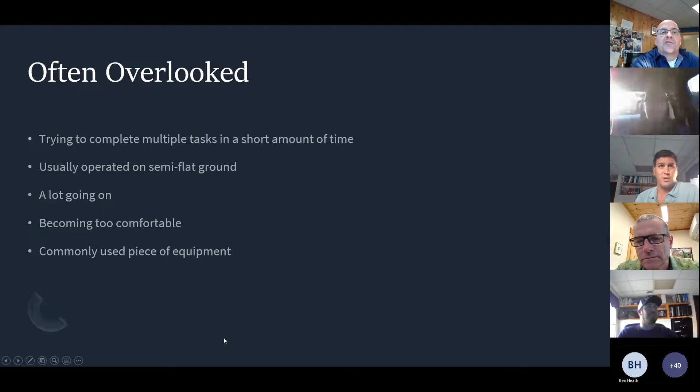Do you have the PowerPoint? Yep, we've got it up. We can see it. The often overlooked bullets are here. Do you see that, Hunter? I don't. So one of your first bullet points we had here is trying to complete multiple tasks in a short amount of time. Yep, I can see it now.

So yeah, these are all different reasons why it'd be overlooked. For trying to complete multiple tasks in a short amount of time, obviously there's a lot of things you're trying to do throughout the day and trying to get a lot done, and that can cause a lot of ruckus and can make things difficult at times.

But another reason is they're usually operated on semi-flat ground. For example, you're usually in a nice loading area, unloading area, so it's usually a pretty flat area, and you don't really think about safety hazards and things that could go wrong. Becoming too comfortable, you just get really used to the equipment and you don't really think anything can happen to you. You don't really take the time to think about safety sometimes, even though you really should.

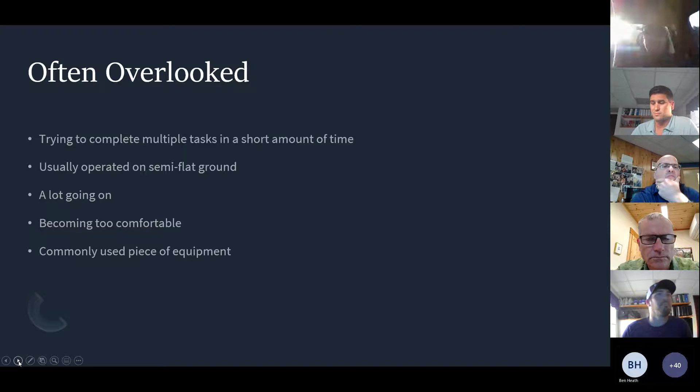And lastly, it's a commonly used piece of equipment, so that kind of just makes you think it can't really happen to me, or a lot of people use them day-to-day, so you don't really think they're that dangerous. None of these are excuses of why you should be overlooking safety, but this is definitely usually the reasons why people do overlook it.

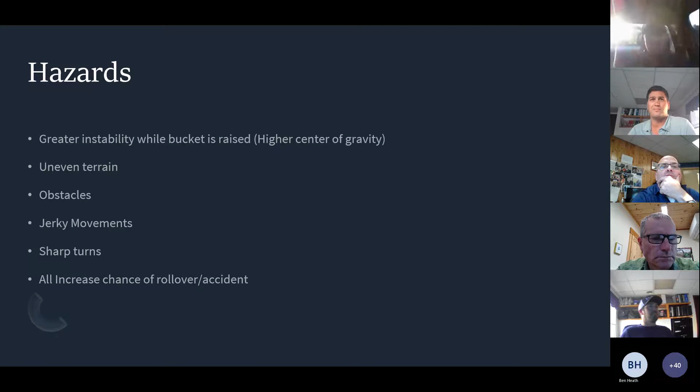Some hazards you encounter while running a loader are instability while the bucket is raised. This gives you a higher center of gravity and can make it easier for the machine to roll over. Other hazards include uneven terrain, obstacles, jerky movements, and sharp turns. All of these increase the chance of a rollover or an accident.

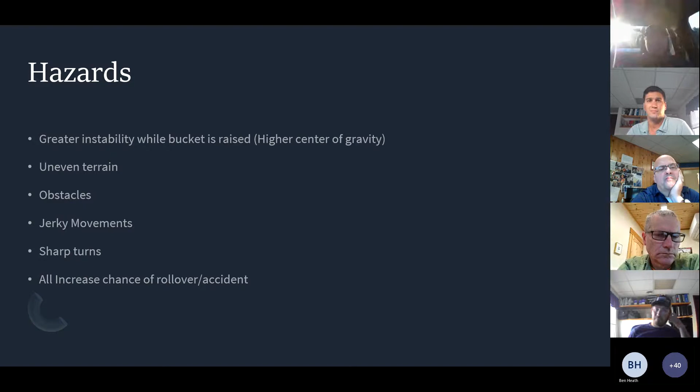Next slide. With accident prevention, usually in a loader you're doing two main things: you're either traveling, or you're going to be unloading or loading.

Some accident prevention tips for traveling: turn the machine at a low speed, and carry the load as low as possible to the ground, especially on a steeper slope or incline. You want to keep that load as low as possible, since the higher center of gravity you get when you pick the bucket up is not very good on steeper slopes.

You do not want to turn the loader with a load raised above it. This gives you a higher center of gravity and can make it harder to control. You want to keep the loaded bucket facing uphill.

Be alert for uneven ground and keep away from edges of banks and slopes when possible. Obviously you're not going to be able to do that all the time. There are times you're working on a slope or near a steep bank and you don't have a choice, but when you can avoid it, you should.

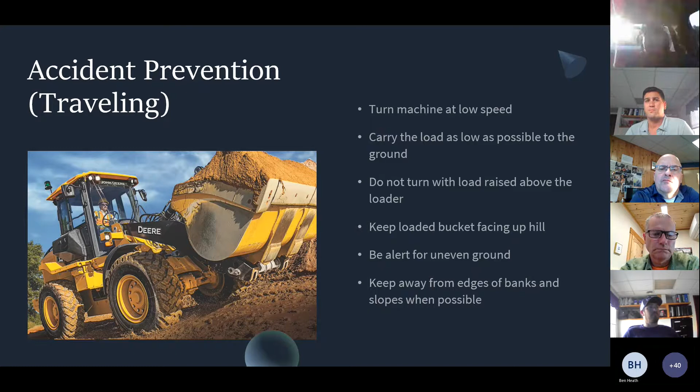You want to raise and lower the bucket slowly and steadily. This helps with the jerky movements I was talking about earlier. When you're doing jerky movements, things can happen fast and you don't really have full control over the machine. You want to drive in a straight line when loading, so you don't want to try and turn and load at the same time.

You want to keep the load balanced, so when you're picking up a load of material with the bucket, make sure it's loaded evenly throughout on both sides. This will help prevent rollovers as well.

You do not want to overload, and you want to keep people away from the loading and unloading area. Obviously that's not going to happen all the time with truck drivers or other people, but when you can avoid it, you should, because it's hard to see everywhere out of the equipment at all times. So keeping people away from there would help mitigate risk.

And yeah, that's pretty much it.

So Hunter, the thing about jerky movements and quick movements with that big load way up there made me think about the momentum you have with that big mass of weight in the bucket. Right, and that momentum when you move quickly is something you don't think about a lot until you've done it. Yeah, definitely. It's hard to stop something big and heavy that's already moving, or that you've propelled in a different direction than you want.

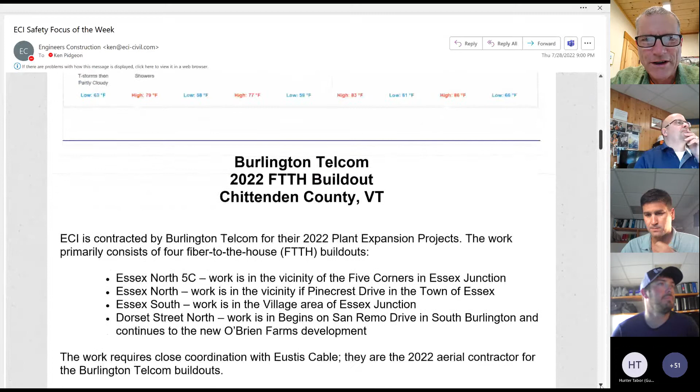For projects this week, we're talking about the Burlington Telecom 2022 FTTH build out in Chittenden County. FTTH is fiber to the home build out, so all residential fiber. Pretty cool stuff, some high speed internet coming to different neighborhoods around Chittenden County through Burlington Telecom. We're contracted by Burlington Telecom for their 2022 plant expansion projects. There's several of them, and the work primarily consists of fiber to the house build out.

We got one in Essex North, they call it, in the vicinity of Five Corners, that was 5C. Essex North is around Pinecrest Drive in the town of Essex. Remember the town versus the city, now we've got a new town/city in the state of Vermont. Essex South, which is in the village area, which is also the city again. And then Dorset Street North, which starts after San Remo Drive in South Burlington, continues out to O'Brien Farms development, the newer development there.

The work requires close coordination with Eustis Cable. They are doing the aerial contract work, and the ECI scope of work continues to increase because they keep finding new places to go.

Oh, it's already down there? Yeah, so I took it. Somebody saying something?

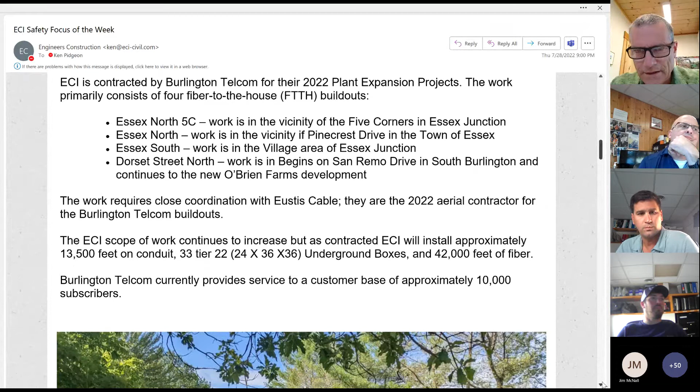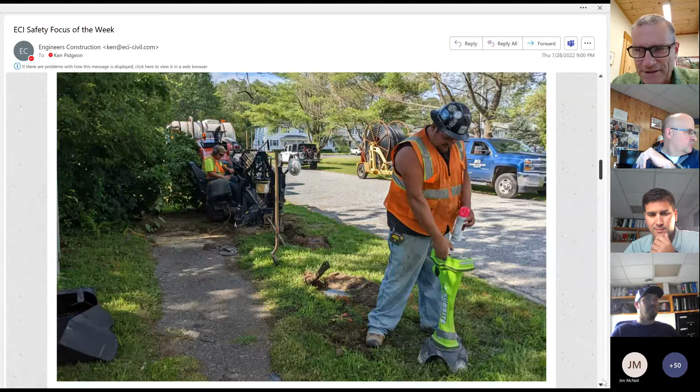Next slide, there we go. So you see the guys out here doing a couple shots, a piece of conduit coming out of the ground in front of the rig where they're doing a splice joint, or there will be when they have to stitch everything together. A lot of it was horizontal directional drilled where it makes sense; otherwise it would be some trenching.

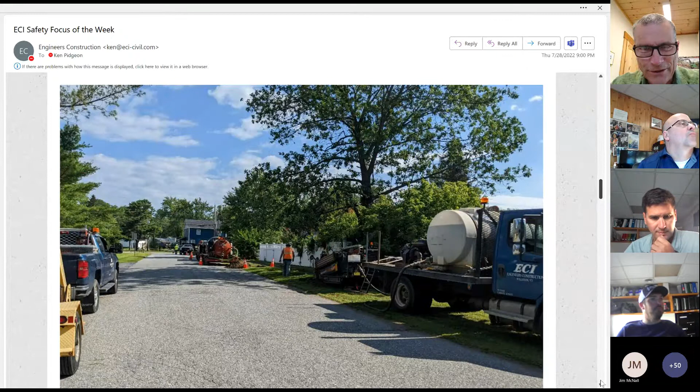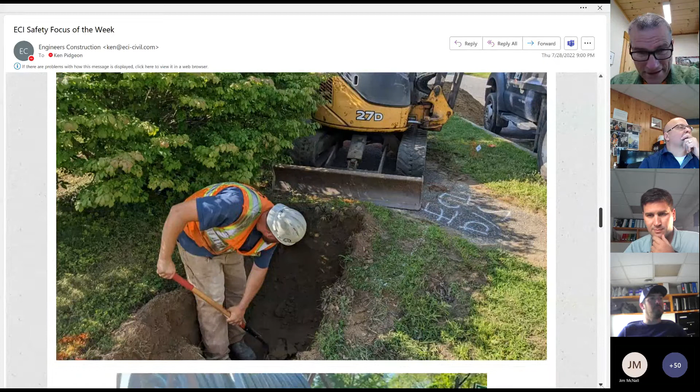This is in Essex, nice street to work on, great soil conditions to be working in for sure, for drilling in and for digging in, doing some potholing here. Just nice stuff to work with. Traffic's not too bad, nice neighborhoods. Here they are pulling in some product, some of the conduit.

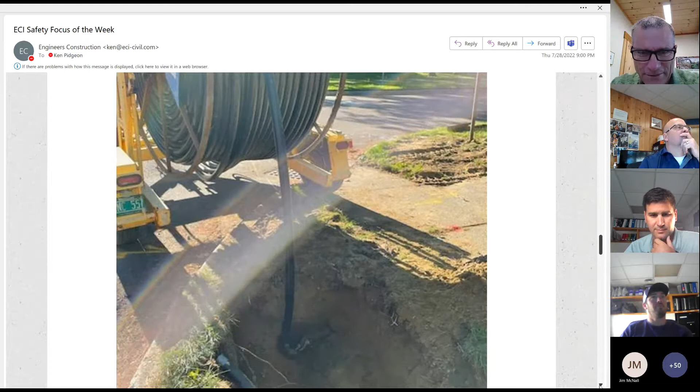There's a swivel down there, a little hard to see, a swivel and shackle, pulling it back, starting to pull it back. Another view of one of the neighborhoods. Of course there's gas in there and power, because all this and telephone are existing lines for TV, cable TV, and everything else, and they're all underground, which complicates it. But nonetheless, at least the Essex neighborhood wasn't a bad place for doing all this, and it looks like maybe a little street lighting too.

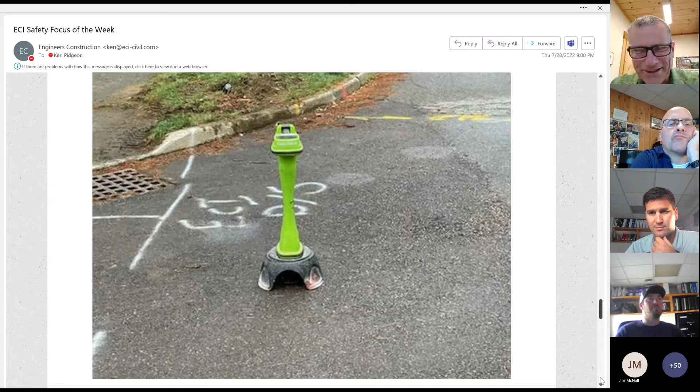Some of the HDD stuff, stormwater and gas there to work around. We've done a lot of the work in Essex. I drove around all the neighborhoods, and wow, it's amazing how much we've done and how quickly it's come together.

From the photo archives here, this is the Level 3 Communications in East Greenbush, which is essentially part of Rensselaer County and right next to Rensselaer. We went into Rensselaer back in December of 1999. Look at the number of conduit they're stuffing in the ground, holy cow, back then they wanted more. Of course this is more of a transmission line, and they just wanted more is better. I'll bet that three-quarters of those conduits are probably still vacant.

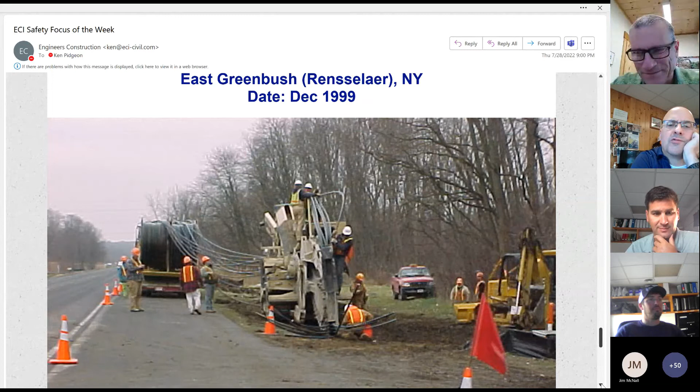So that's what I got. If anyone else has anything out there, have a good, safe day and safe weekend. I'll turn it back to you, Matt.